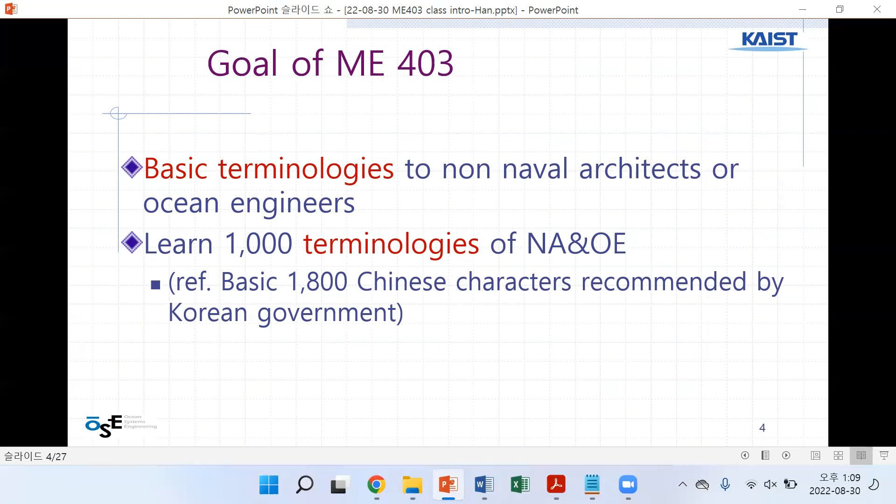Course material will be uploaded on the website, and you can also see more on the previous website. The textbook is 2 books: one for naval architecture, the other for ocean engineering.

This is a very heavy book, it has more contents, very serious contents of naval architecture, prepared by the United States Society of Naval Architecture and Marine. This one is just a Korean translation of this book, so you don't need it as a translation.

So this is the book, the original book, right, by Harry Benford. He probably retired, and died some years ago. He was a professor at the University of Michigan, United States. It's a good book, right, for non-naval readers. And this one is the Korean translation.

And this is another textbook for ocean engineering, and this one is just a reference book - it's volume 3 of the heavy book of Principles of Naval Architecture, coming from the Society of Naval Architecture.

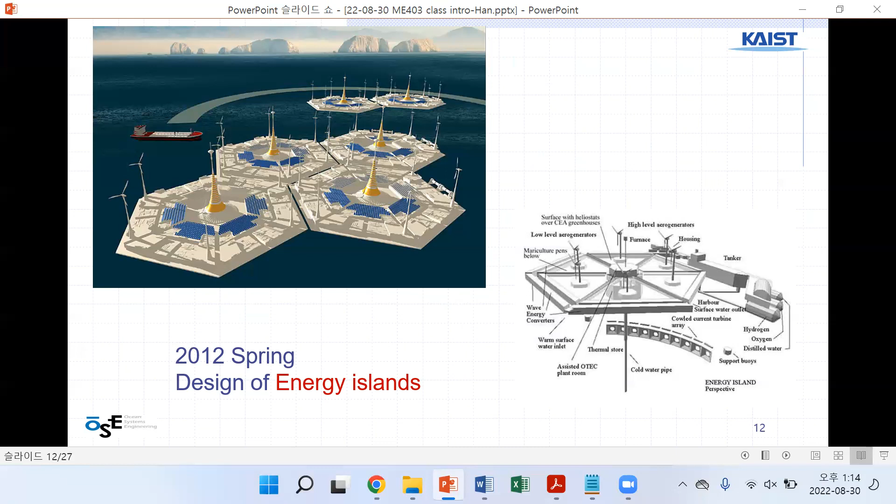Another, probably bigger problem is area - they are capturing, because Google or Microsoft nowadays have more data coming to their site network, so they need more storage space. Every year they need to have one park of data centers. So underwater gives two advantages: area cost, and also cooling water. But there is also a disadvantage because the cable should be longer.

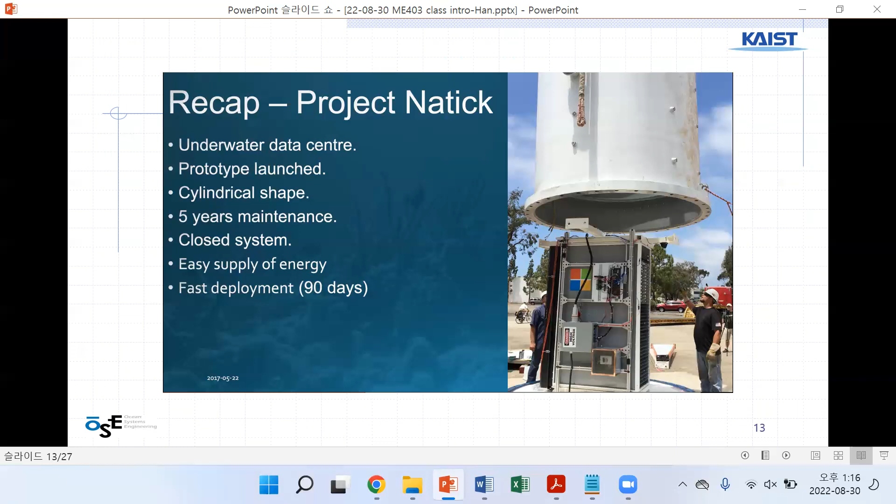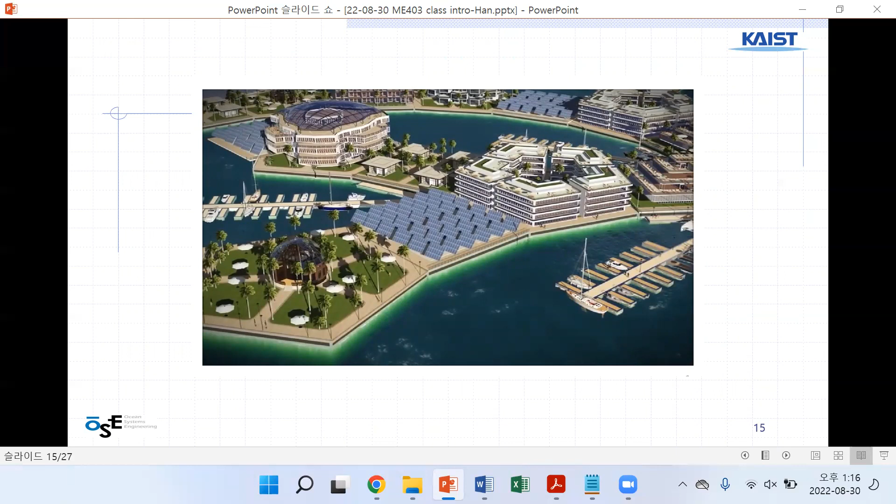30 kilometers outside of the land side. There was a small island there, but they expanded that island to build a port around it. Then they needed a long bridge to the land, of length 30 kilometers - a long bridge to the port. So that is not a floating port, but the idea is similar. This one...

This is really floating, or something like a floating port - an offshore port. So the idea can come from land costs and also congestion inside the port, and also traffic coming from all around the sea. Usually the port is near the land, and the entrance is narrow in old conditions. So this side is wide open. There can be advantage and disadvantage.

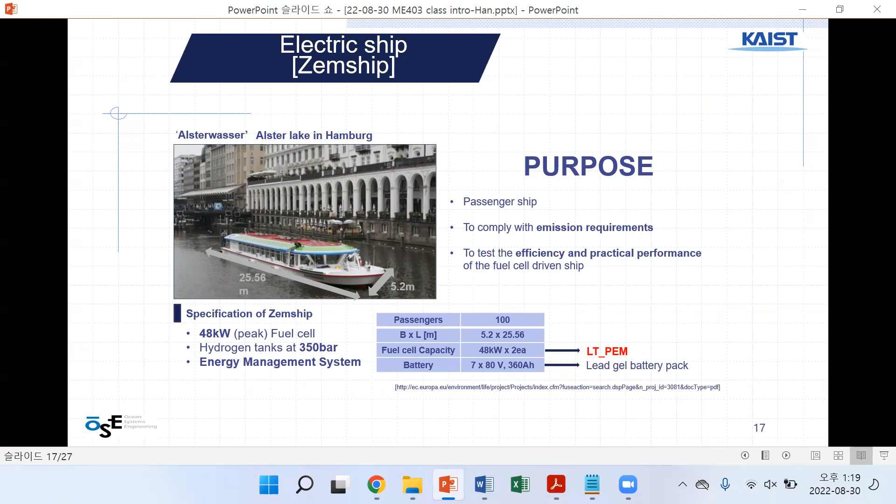We learned that there is a big area around the globe where garbage collects, like this. There are probably 5 or 6 big areas, bigger than a big island, where only garbage is circulating.

So we said, if you find that area, like a question: what is this, garbage, where, in what ocean? In each big ocean there is some collecting point, Pacific or Atlantic. There are many, 5 or 6, maybe more. 5 or 6 is the biggest, but there are also small ones.

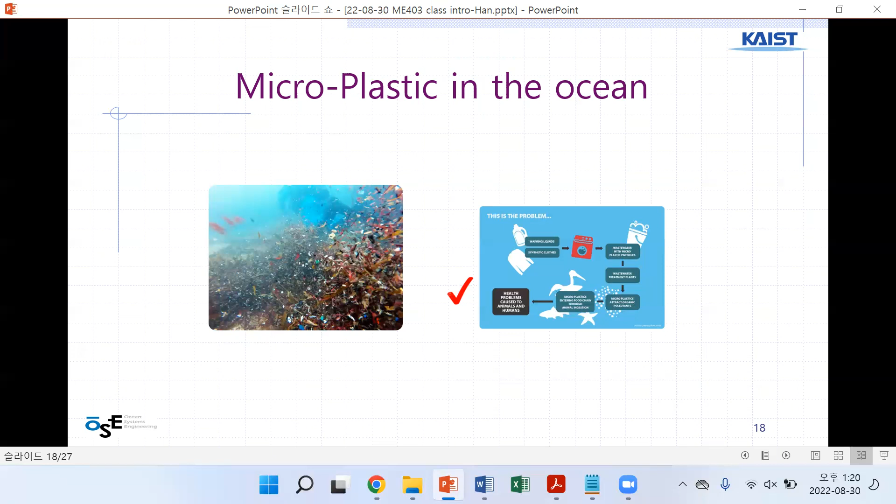Here you see a 22,000 TEU capacity ship, meaning it carries 22,000 boxes of containers. It's a big one, right? They also use LNG as fuel, which is better for pollution, since pollution is also very serious.

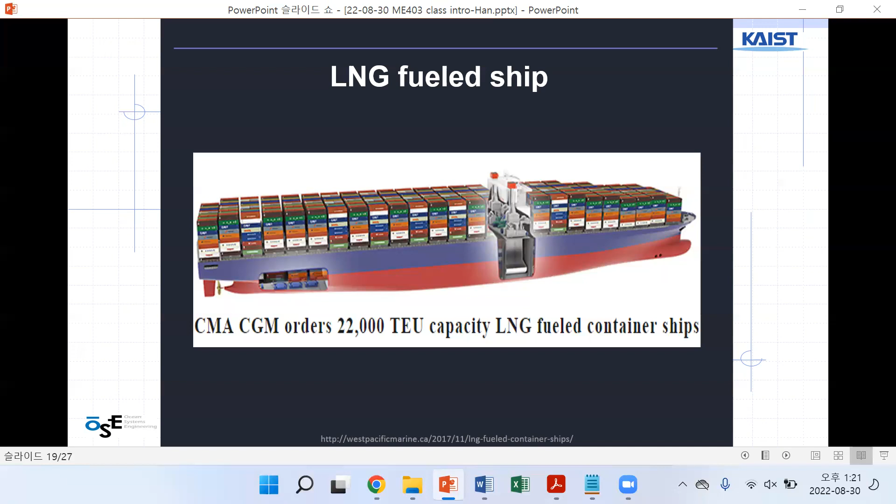For your case, what will be the idea? I showed this slide in springtime: life saving at sea, Korean Coast Guard, because fishing tourists sometimes in summer have cases of fishing boats capsizing, accidents inside Korea. The passenger ferry Sewol, 8 years ago, was a big accident in Korea. Also oil production site explosion - I remember the Gulf of Mexico 10 years ago, BP, British Petroleum Company's production site had a big explosion. Unmanned ships are now popular these days, along with electric propulsion, renewable energy islands, and pollution.

You can choose. This spring there were only 3 teams with a project, and their title was Hyperloop - a train, underwater train, very high speed. And then data center, and monitoring coral, some kind of plant inside the sea, and monitoring with animals, observations. They used a turtle carrying some sensing devices. It was interesting.

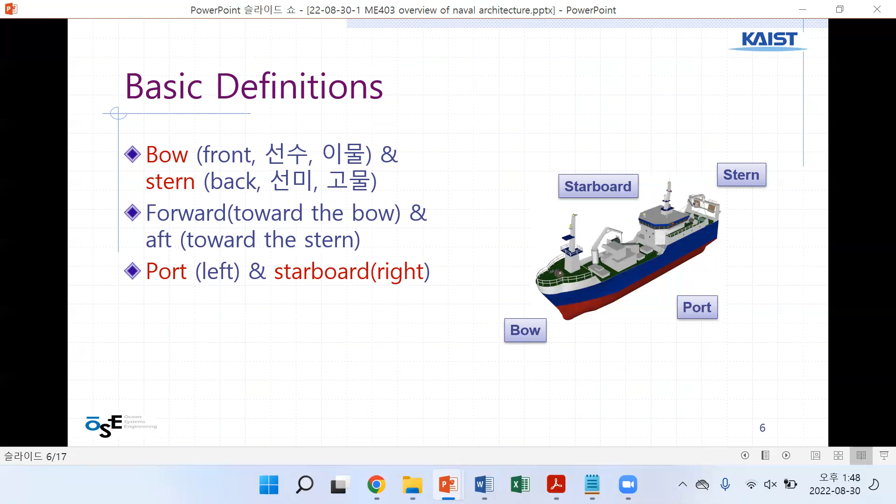So there's a new thing there, and also another basic terminology: draft - draft is 'hulsu' in Korean - and then depth and freeboard. Freeboard may also be new words to you.

So this is a cutting of a ship. Draft is up to here, where the water lies. We call this hulsu in Korean. And this one is freeboard. Then midship is in the middle body of the ship. When you look at a ship, that's the middle, the midship. Depth is together with these - up to here is the depth, and depth is divided into draft and freeboard.

So have you had a chance to ride a small boat? No chance to ride a boat. That's all right. A small boat, like for one person or two people, very small.

If I'm carrying a small boat, next time I will bring a water dish or something. The water dish floats in the water, right? And then I put a stone in it, it keeps going down, right? Until the water level reaches here, and then the dish submerges because water is coming into the dish. That's why we need a freeboard for safety, because waves come and the ship is rolling, so there should be at least some margin.

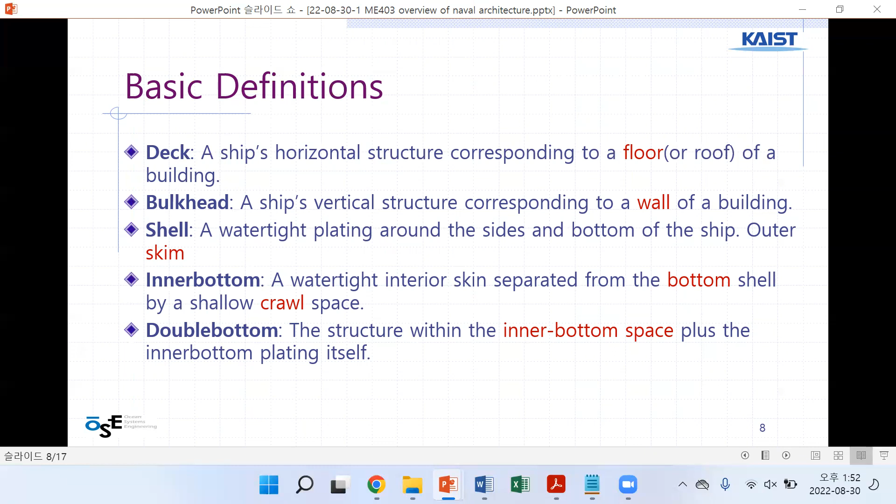But hull includes the shell and bodies, frames, and pillars - similar to the concrete construction of a building. So watertight plating around the side and bottom of the ship is the outer skin, and inner bottom and double bottom is very similar - you can see in the picture.

So this one is the double bottom - the bottom skin is doubled, double skin. Why do they develop such a double skin? Because of the grounding of the ship. When you go to sea or near the sea, there are rocks and shallow water, right? So probably they hit rocks sometimes.

Titanic - have you seen the film Titanic? Yes, raise your hand. Titanic, the famous film, right? Except for you, in the chat. It was a big disaster, a big disaster, 100 years ago. Several hundred people died, probably 1,000.

But the reason why the Titanic sank, do you remember? Iceberg, right? The ship hit the iceberg. But do you remember how they hit the iceberg? I heard it on a sports special. The hit resulted in the outer skin being cracked for several meters, so water came in through that scratch.

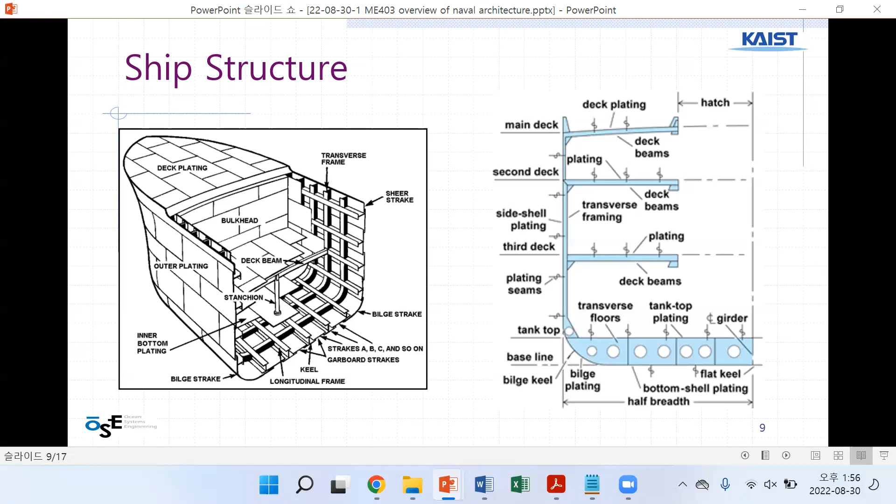Weight. This is a complicated one again.

Have you had a driver's license? Have you had a chance to drive a truck? Yes, sir. How big was it? A Toyota. Sorry, say again, I don't know the size of the truck. Toyota, yeah, a small truck or a big truck? It must be a big truck.

Depending on the size, probably length or breadth, but usually for a truck you need to say how many tons the truck can carry. That is the money earning number, right? A 1 ton carrying cargo truck is probably the smallest in Korea. The very famous Bongo truck in Korea is very well selling, best selling truck, and they carry 1 ton of cargo. It is important for the driver because they get money delivering cargo. They want to carry 2 tons if there are enough cargoes to carry. So there is also 20 ton, 40 ton, 10 ton, 5 ton trucks.

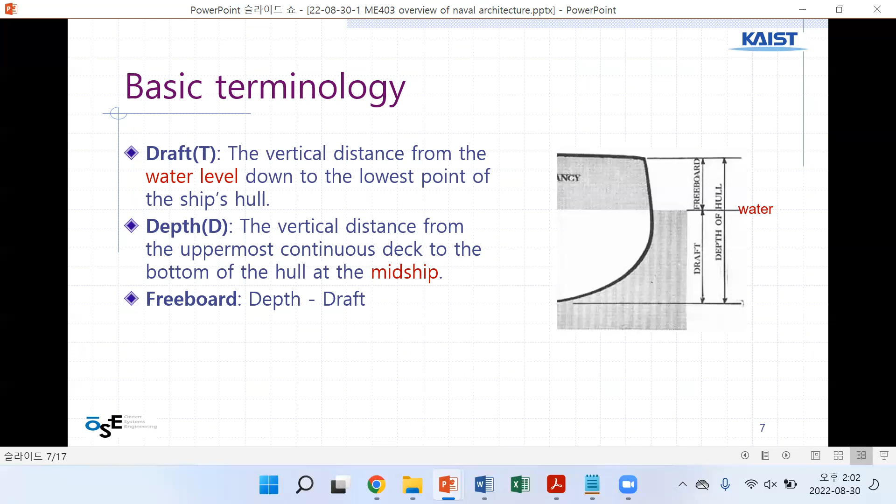What kind of differences? Let's say a Bongo truck - let me say again - a Bongo truck just delivered from Hyundai Motors to my office. But how about the gasoline? Is the fuel tank empty or do they put a little bit more fuel in there? How do you expect? Empty? No fuel? Usually they put a very small amount of fuel because sometimes they need to drive it for delivery, otherwise you'd need to push it.

And also lubrication oil - do you expect it is empty or loaded? Loaded, okay. And other small items, right? So if we include that kind of small items, that's a difference. Also for the ship, the weight of crew members, the driver's own weight - is it included here or here? It's a small thing, small items. Or baggage of the crew member, and food and drink is a complicated thing, but it's not a big one. Very small items, but still small differences.

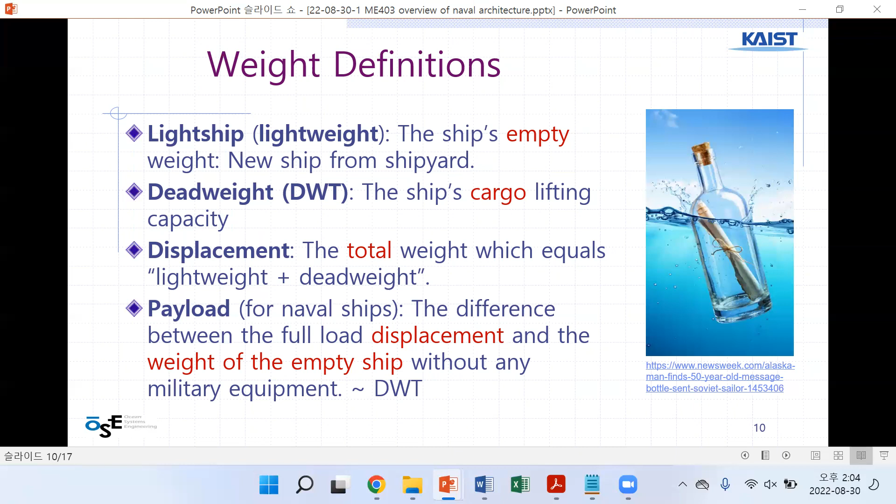History. Egypt again, Khufu. Okay.

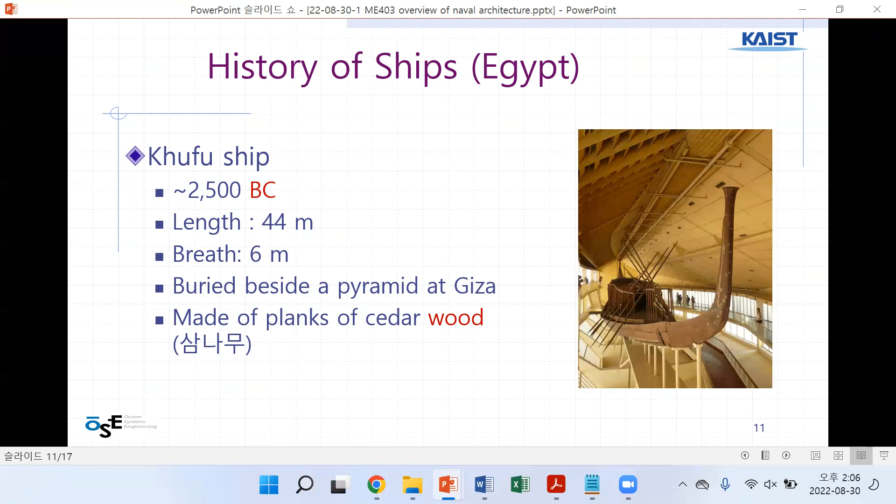History of the Greek ship. Phoenicians and Greeks were well-known shipbuilders and navigators in the ancient Mediterranean. And that's why I'm saying the terminology is coming from 5,000 years ago - stern and bow, port side and starboard side, hull, right? That kind of terminology comes from several thousand years ago. It is very historic and also peculiar, unique.

Comparing to the airplane, comparing to the car - how many years are they saying? 100 years, not 200 years ago. But ships, he's saying, were already used 4,000 years ago. That's why the concept and terminology is much longer.

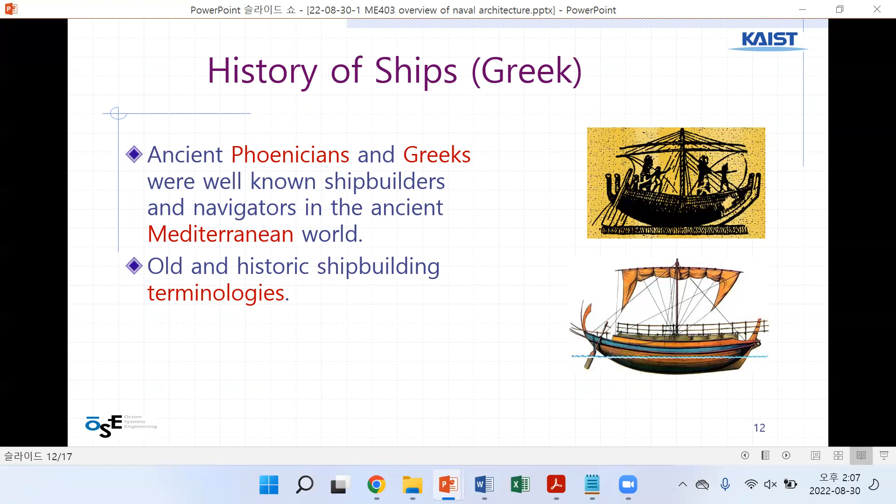He's saying he tried putting something heavy, a stone probably, into a dish or box so that the water level, the draft, goes up and up. And he is experimenting with this. Why? He's trying to find the correct weight of this golden crown. What was the story? Can you say about this story? Why did he want to make a correct weight of this crown? Can you remember?